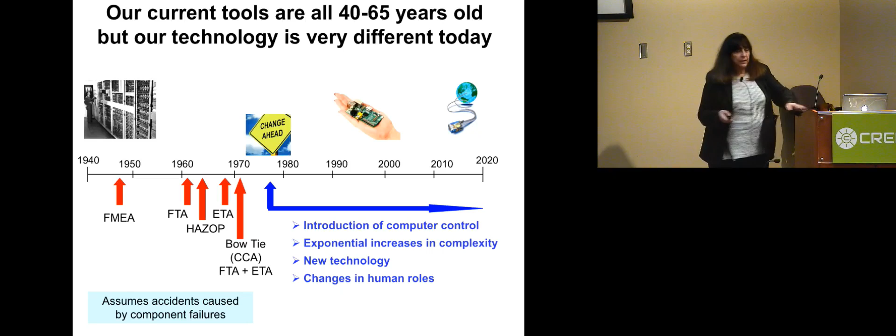Starting around 1980, all of a sudden the world of engineering changed. We introduced computer control to a great degree, exponential increases in complexity of the systems we were building, lots of new technology, and the human roles in systems were changing. Humans weren't just following a bunch of procedures — they were monitoring and supervising complex control systems, usually based on a computer.

Now, let's start with what do people do now, or what did they do then? What is the basis? Underneath all of this is this model of causality of accidents, which actually comes from the 1930s — the Domino Model. It basically says accidents are caused by a bunch of events like dominoes, each one leading to the next.

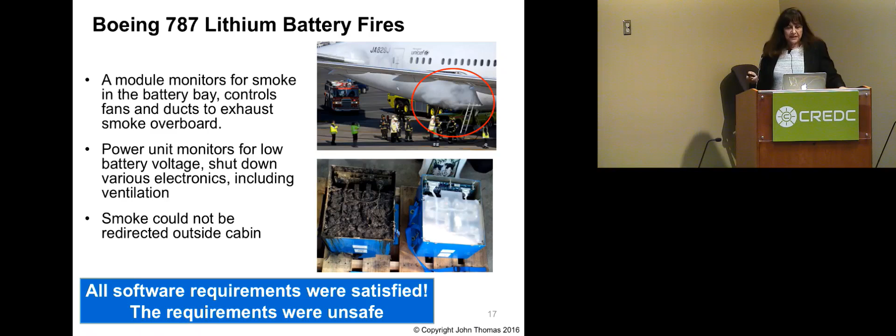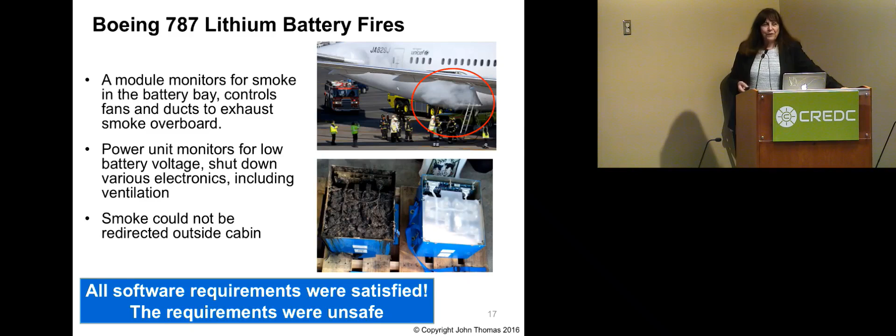All right, all the software requirements were satisfied. The requirements were unsafe. I've been doing this for 36 years. I've read hundreds of accident reports, and many of them had software in them. And every time software was related, it was a requirements problem, not a coding problem. So that's the first really important thing: everybody's working on coding and testing, and they're not working on the requirements, which is the real problem.

So there's two kinds of accidents: component failure accidents, which we still have, and component interaction accidents. These are related to complexity and coupling in our system design, and none of the components may have failed at the time. So we're confusing safety and reliability.

And everybody's still using all those tools, and they're missing all those accidents. The other thing I want to say quickly is, do operators cause all accidents? You've all been told operators cause most accidents. Pilots cause 80 to 90% of accidents, supposedly, and it's always human error.

Is it really? Well, the traditional view says the operator is the cause, so what we do is do something about the operator. Fire them if they aren't already dead, retrain them, suspend them, or do something about operators in general. If it's the operator's fault, get rid of them. So we marginalize them by putting in more automation, so they're farther away from the system they're controlling, or we rigidify their work by creating more rules and procedures that they can't follow.

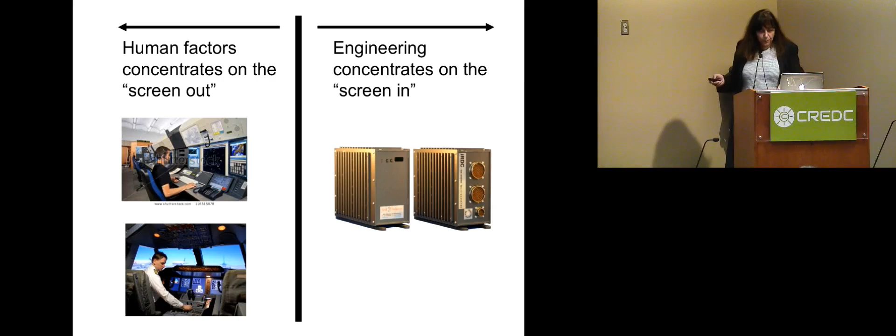And what we're ending up with is nobody looking at the integrated system as a whole. So we're designing this stuff as engineers where we're causing mode confusion, situation awareness problems, inconsistency. We are causing the pilots to make mistakes, and then we're blaming it all on the pilot instead of fixing the real problem.

So we need something new. New levels of complexity, software, human factors just don't fit into this reliability-oriented world. And so two approaches are being taken.

The second approach is at least they admit it, but then try and shoehorn the new technology and new levels of complexity into the old methods. I did that too for a while. My first thought was, all right, we already have fault tree analysis, we already have all these analysis techniques, just add software to them. Except it doesn't work, because this is a totally different problem that we're trying to solve.

So let's first look at the traditional approach to coping with complexity. It's called analytic reduction. This goes back to Descartes. It's totally what you've been taught your whole life in engineering and in your science courses. Basically what you do is, if we have a complex system, what do you do? Well, divide it into pieces, and look at each piece separately.

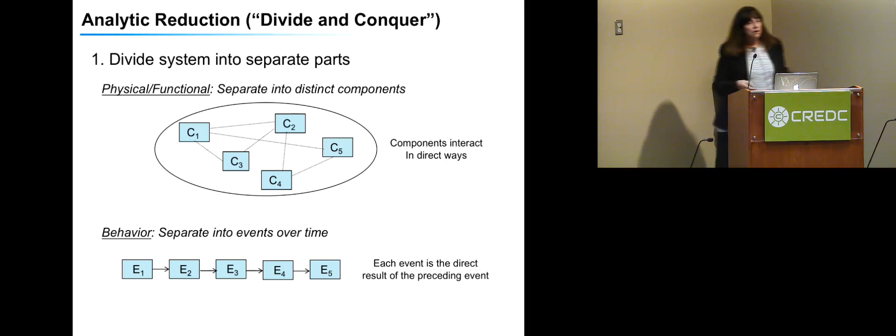So we divide them either into physical pieces or into functional pieces. And if it's behavior, we separate them into events over time. Look familiar? That sort of looks like my chain of events, and in fact it is. And then we analyze the pieces separately and combine the results.

But that makes some certain assumptions there. It assumes that when you separate them, you don't distort the phenomenon. Each component or subsystem operates independently, that their behavior is the same when they're looked at individually as when playing their part in the whole. They're not subject to feedback loops, nonlinear interactions, other kinds of things. And the interactions can be examined pairwise. Otherwise, we couldn't put them back together again.

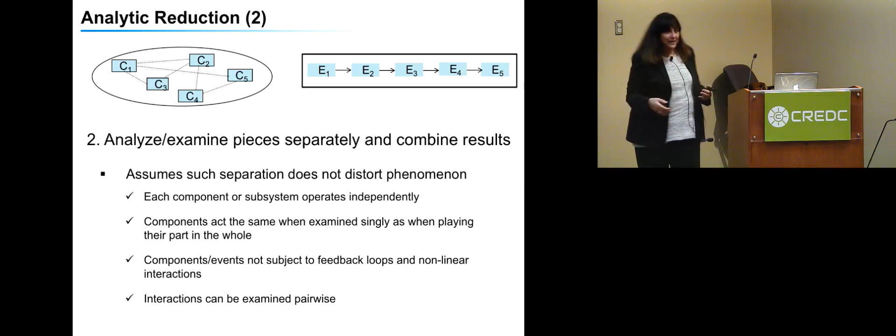All right, great assumption, works on all kinds of systems. I mean, it's made modern science and engineering. So I'm not going to complain that this doesn't work. It does, except it's not working on the new systems we're building. The systems we're building are tightly coupled, software intensive, highly automated, and connected.

Now, I can tell you, just don't build these. And you're going to look at me and say, oh, yeah, academic. Of course you're going to build these systems. So we're going to have to do something besides just say, don't build them. And to do that, I believe we need a new theoretical basis, because our systems don't fit the underlying theoretical model that's being used here.

People mean well. They're really trying hard to solve the problems. It's just that they're solving the problems for a different problem—providing techniques for systems that aren't true anymore, aren't there anymore. So we need new tools for the new problems.

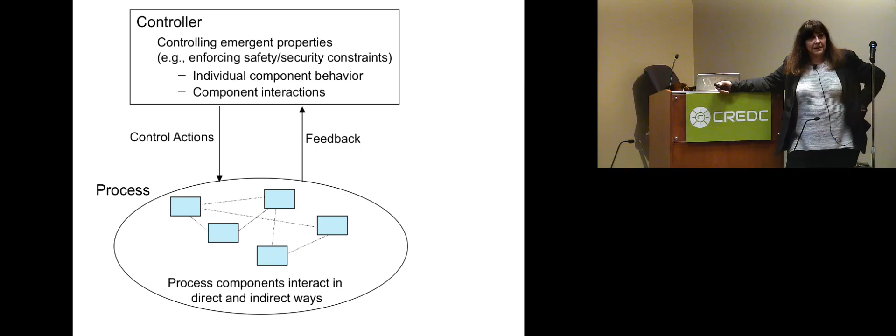So what do you do if you have an emergent property? You need to control it. We introduce a controller of some kind that enforces safety or security constraints on both individual component behavior and component interactions. We have control actions that the controller can issue to the process, and it gets feedback about the state of the process. Now, most of you are engineers, you've had a basic controls class, and you're going to say, well, yeah, that's just feedback control loops. Yep—underlies control theory, too.

Here's an example. If every airline decides that their planes are going to take the direct route to where they're going, at the time they want, optimizing each airline's schedule independently, what we end up with is everybody ending up at JFK, O'Hare, and probably LAX at 5 p.m. And of course, that's not going to work.

So what we do is put a controller that controls the interactions—the tracks that the planes go on, how they go, when they go. What we do is keep them apart, which maintains safety, and we optimize throughput, which is another emergent property. So every airline doesn't get optimal, but the whole is optimized, and they probably end up with a better result than if we just had chaos, or everybody fending for themselves.

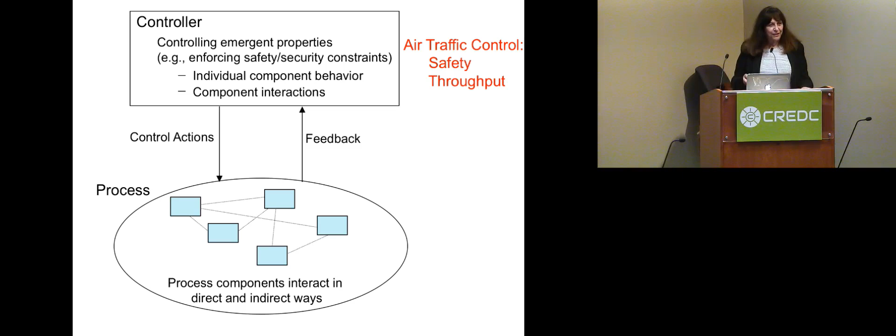So they enforce safety constraints: not violating minimum separation, maintaining sufficient lift. The level of liquid in an ISOM tower must remain below a specified level. Toxic chemicals and radiation must not be released from the plant. Pressure in a deep water well must always be controlled. Weapons must never be detonated inadvertently.

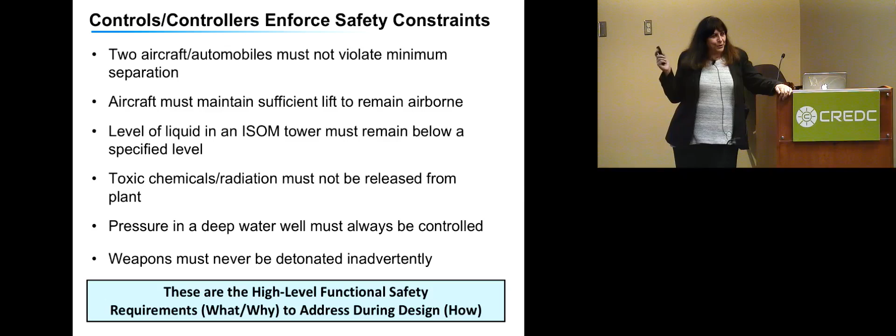These are the high-level functional safety requirements, and what we need to do is build a system that enforces those requirements. So what we've done is taken what was a failure problem and made it into a control problem.

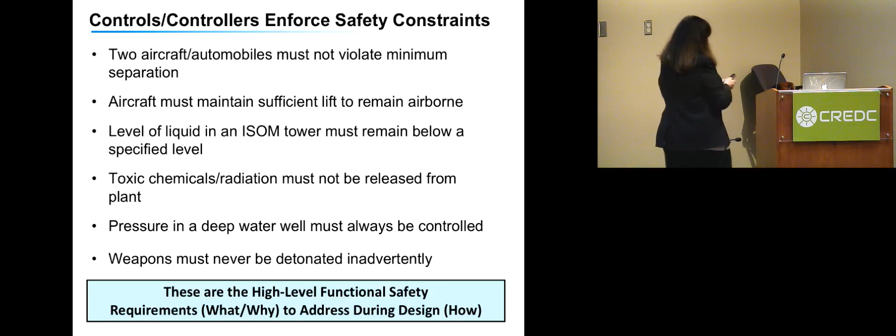There may be dozens of interacting control loops. That's the problem - they have this in auto, which one of my brilliant graduate students has figured out how to solve in a really easy manner, called feature interaction, where all these features on the car were all designed separately, somehow interact in unexpected and bad ways. So who would have thought that on a GM Cobalt, if you had too many keys on your keychain, it would cause the front passenger airbag not to work?

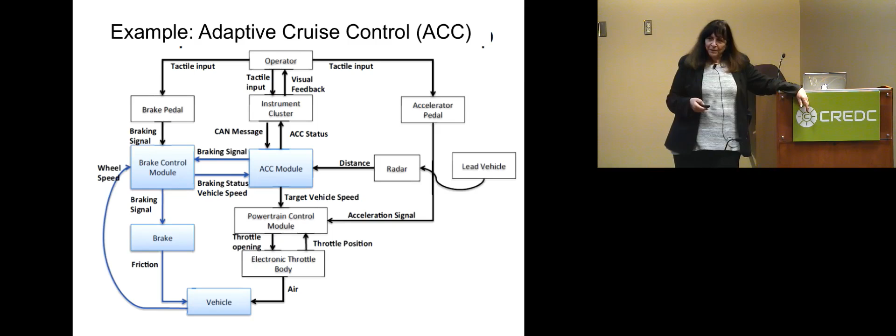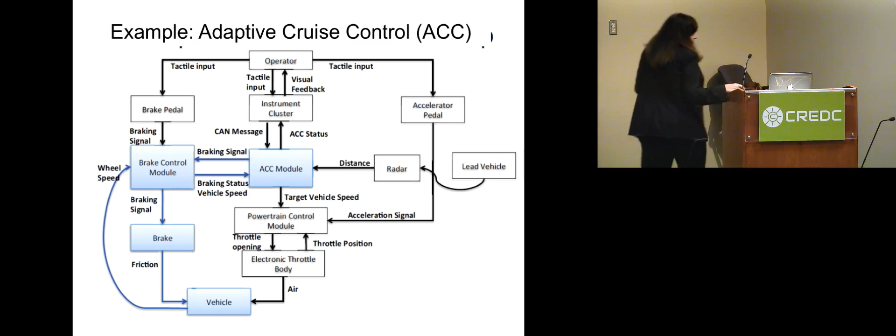And we've killed several people that way, or GM has. The complexity of these things is astounding. There are now, on the car you drive, probably, if you drive a new car, about 100 million lines of software. The F-35, the Joint Strike Fighter, the newest, latest military jet, only has probably 20 to 25 million - a fourth of that. Our cars are getting stupendously complex, and they're all using our techniques because the old ones aren't working.

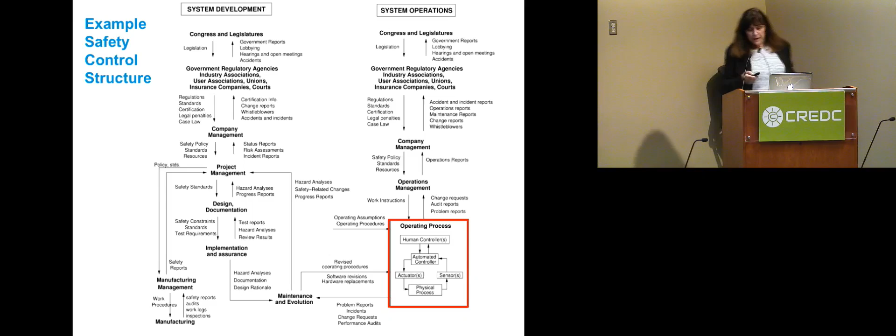So we can also put in - I know you can't see, and I want to spend a lot of time on it - Congress, regulatory agencies. Controls are also social controls or managerial controls. So we can include management, regulation, and other things into our analysis and our models. So again, what we're doing is recasting safety as a control problem. We design an effective control structure that eliminates or reduces these adverse events. And that can involve physical design, operations, management, social interactions.

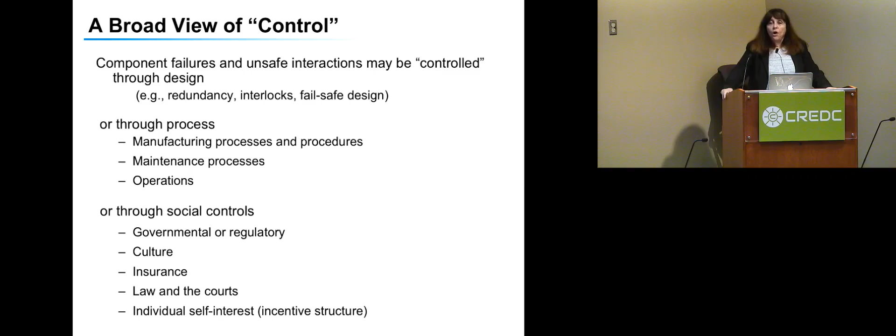And I just want to make one point. There's a very broad view of control being done here. You can control failures and unsafe interactions through design - redundancy, interlocks, fail-safe design, which we do now - or through process, manufacturing processes, maintenance, operations, or through social controls. Government or regulatory controls, culture, insurance, law - individual self-interest is probably the best way to get people to change their behavior.

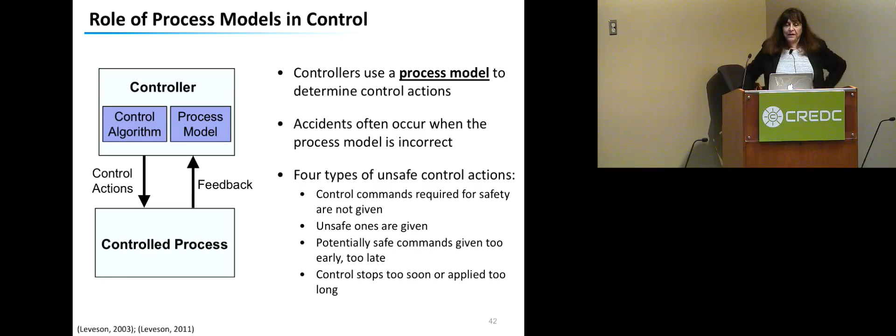There's one other aspect of this. In any control loop, there's actually a theorem in linear control theory: every controller must contain a model of the thing it's controlling. So I call that a process model - it's a model of the controlled process. In a human, we usually call that a mental model. In software, we have it, but you don't ever talk about it. It's usually just a few variables, but it has to be there.

I contend that accidents often occur when the process model is incorrect. For the Mars Polar Lander, the spacecraft was 40 meters above the surface, but the controller, the software, thought it had landed. So it issued a control action to shut off the descent engines. Now, that's a much better model of why software misbehaves than saying the software failed - I don't know what that means. Software is an abstraction. How do abstractions fail?

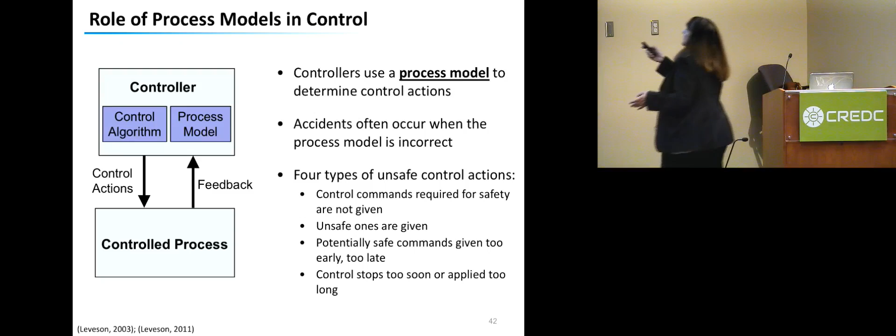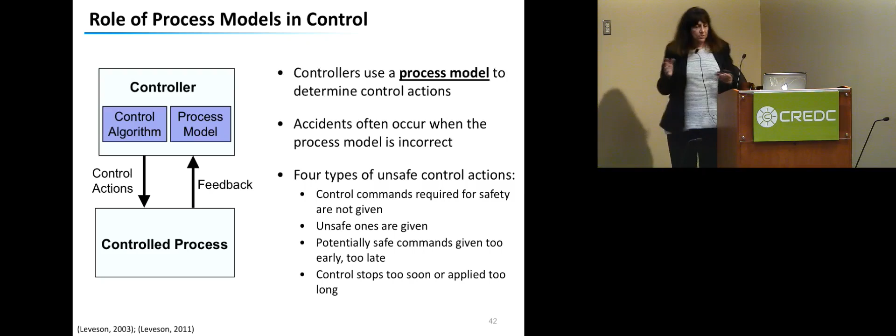There's 4 types of unsafe control. The control commands required for safety aren't given. The unsafe ones are given. Potentially safe commands are given too early, too late, or control stops too soon. I don't have time to go over those because I want to give some examples.

What we do is take that and look at - this is just a more detailed control loop. Here's a controller, actuator, sensors, the controlled process. There may be other controllers interacting with this. And what I did was annotate each of these with what could go wrong. The process model could be inconsistent, wrong, incorrect. The algorithm could be inadequate. These are the control actions - could be inappropriate, ineffective, missing. The actuator may not work, delayed operation here, conflicting control actions. Component failures - we still have component failures. I haven't gotten rid of anything, I'm just adding.

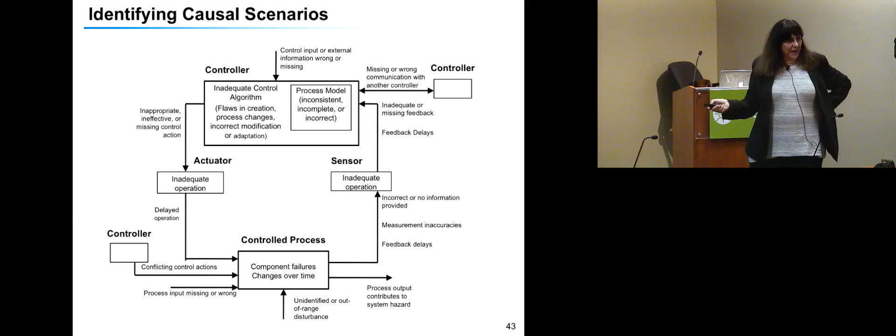Changes over time on the feedback, measurement inaccuracies, feedback delays, missing feedback, and so on. And what we do for the analysis is we just build that control structure like you saw for the braking system, the adaptive cruise control, and do an analysis on that control system, that control loop. And that's all we're doing.

I'll tell you a quick example. The whole underlying model, replacing the chain of events model, is called STAMP, System Theoretic Accident Model. It's just a new, more powerful model, based on systems theory rather than reliability theory. It treats accidents, or losses, as a dynamic control problem versus a failure problem, and it includes the socio-technical system, component interaction accidents, software system design, human errors, and so on.

And what we can do is take STAMP, which is just a theoretical model, and build a bunch of tools on top of that, like new accident analysis tools, new hazard analysis tools, new security analysis tools, new ways to identify leading indicators of increasing risk, organizational cultural risk analysis, and put those together into various kinds of system engineering, risk management, regulation, and so on processes.

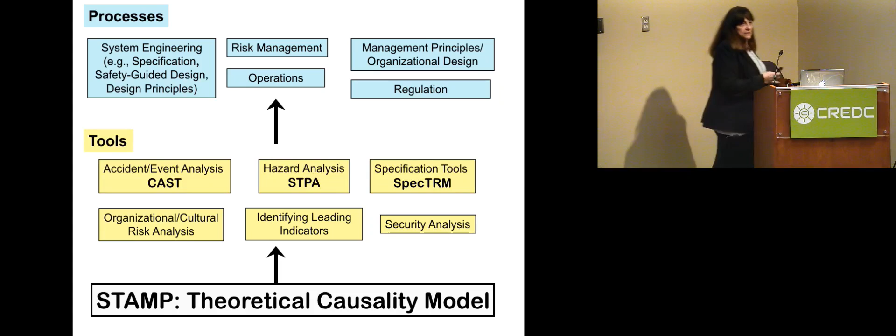And one of the good things about this is we can start it early. This is pretty standard: 70 to 80% of safety-related decisions are made in concept development. But here's concept, requirements, design, build, operate - we normally don't start doing it until at least we have the requirements, and usually we need a design to use the current techniques. It's too late.

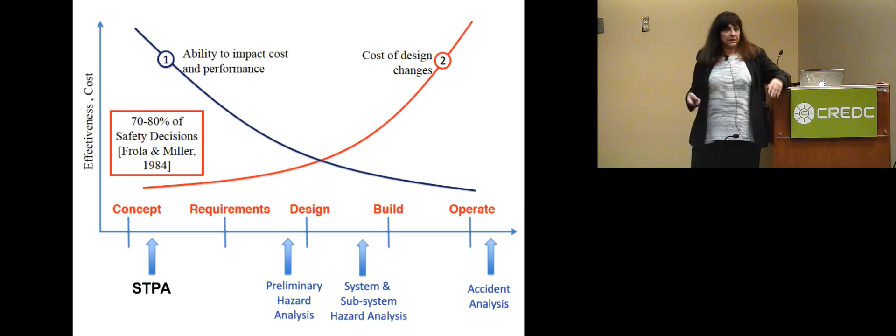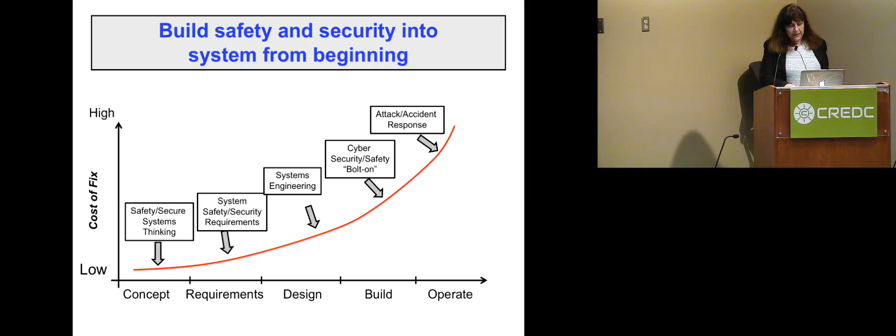The cost of making changes late is enormous. Rework is the biggest cost factor in any system engineering project, and it's why things fail, or go over budget at least. So what we want to do is build safety and security in. Same thing with security - we tend to spend a lot of time on attack response. Maybe we add some bolt-on stuff during the build, at the end, bolt on some security techniques. Almost nothing is ever done in designing this thing to be safe and secure from the very beginning. That's what we can do with this new approach.

Now I'm going to go over one example quickly to show you the results you get. This was a non-advocate safety assessment of the U.S. ballistic missile defense system, the new missile intercept system that we have. It was done just prior to deployment. The hazard was inadvertent launch, and nobody knew how to do this. This is an enormously complex system, probably one of the most complex we've ever tried to build. And they had to do the safety assessment for inadvertent launch, but nobody knew how to do it.

I came up with this idea around the year 2000, but I didn't say anything to anyone because it was so bizarre and weird compared to what people have always done that I thought they're going to say, oh yeah, Leveson, she did good work when she was young, like N-version programming things, experiments, but now that she's getting older, she's sort of lost it. So I didn't tell anyone because I wanted to try it on some real systems. I wasn't really planning to start with something quite this real and this complex. So someone did this without telling me until afterwards, because I would have murdered them.

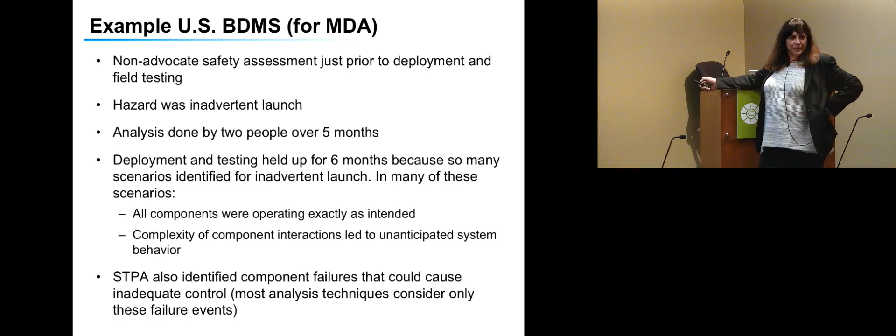What? It's being recorded, be careful. That's right, that's right, I'm really actually a very pacifist. I would have only written them a nasty note.

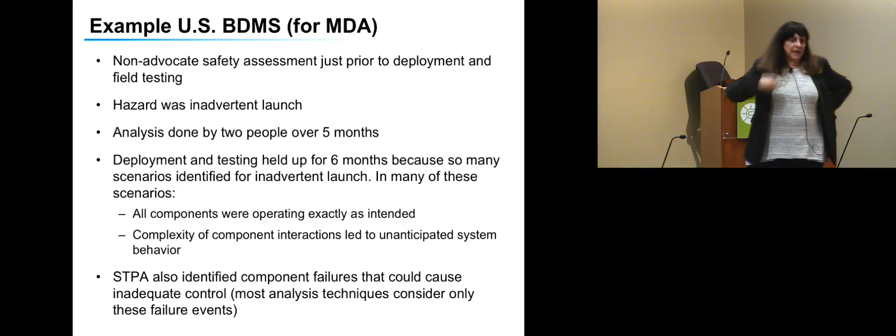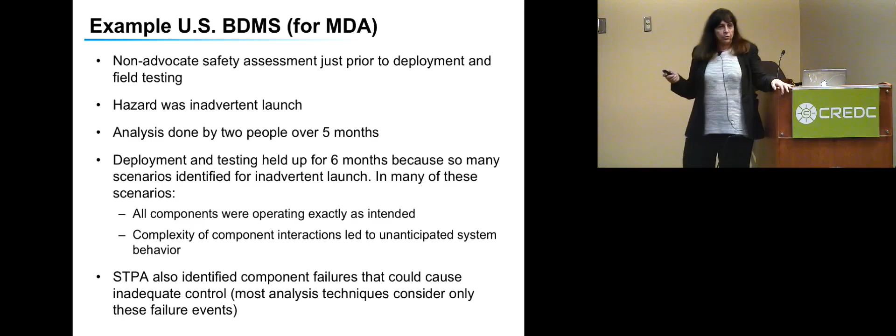The analysis was done by 2 people over 5 months. These 2 people, who didn't know anything about the system to begin with, found so many problems with it that deployment had to be delayed for 6 months. It cost them $200 million just to fix the stuff which was really low-hanging fruit that they found first, and then they hired them to do this for the rest of the system. But what they found was exactly what we said: there were lots of scenarios where all the components were operating exactly as intended. It also found the component failure scenarios that the old techniques find, but those didn't find the other ones.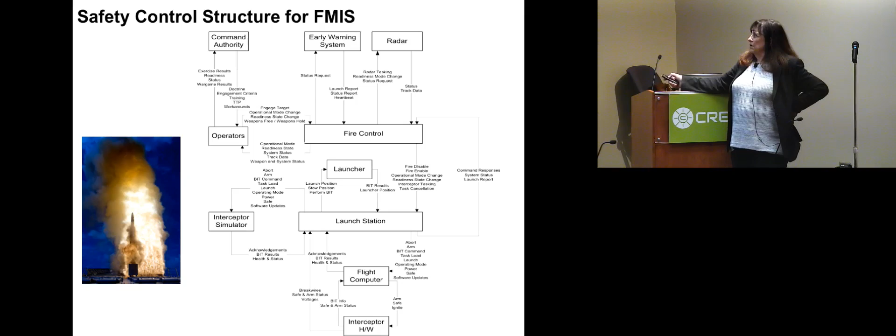The fire control computer, if it thinks it has a missile coming in or several missiles, it's called track. They have an active track. They send a command, and the one we're going to be concerned with is fire enable, to the launch station, which controls the flight computer, which launches an interceptor. There's also a launcher here, and some simulator that's always going on to make sure this thing is still working.

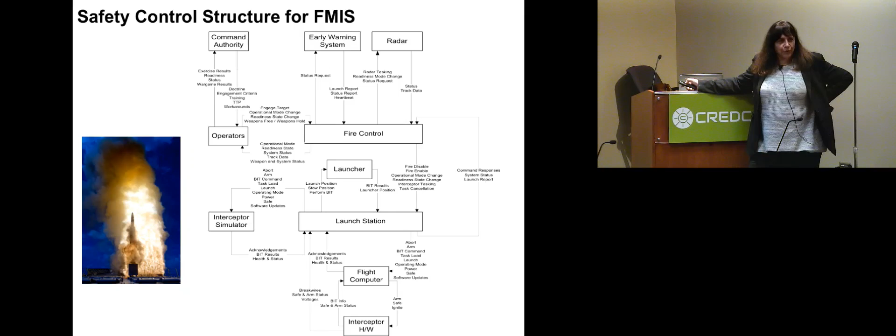So the hazard of inadvertent launch says that the launch station issues a launch command to the flight computer when there isn't an active track, right, when it isn't a threat. And that can occur if the fire control computer issues a fire enable command.

Now, so we take those 4 types of unsafe control actions, and let's look at fire enable. If it doesn't provide it, it's not unsafe. So it doesn't provide a fire enable. There's no unsafety with respect to inadvertent launch. It didn't tell anyone to launch.

If providing it when there's no threat detected, wrong timing, discover the track is spurious, they send a fire disable. So they send a fire enable. They decide, oh, this is spurious. This is a friendly thing, a flock of birds or something. So we're going to send a fire disable, but they arrive in the wrong order. And the other one isn't applicable.

So let me just give you an example of what we come up with, what the results are. Here's a fire enable causing the hazard. The process model incorrectly thinks the threat exists.

So the fire control computer is intended to send the fire enable command to the launch station when it receives a weapons-free command from the operator, the human operator. FMIS just stands for fictional missile intercept system. The Defense Department gets a little unreasonable about my showing the real system. So this is a fictional system, but very similar to the real one.

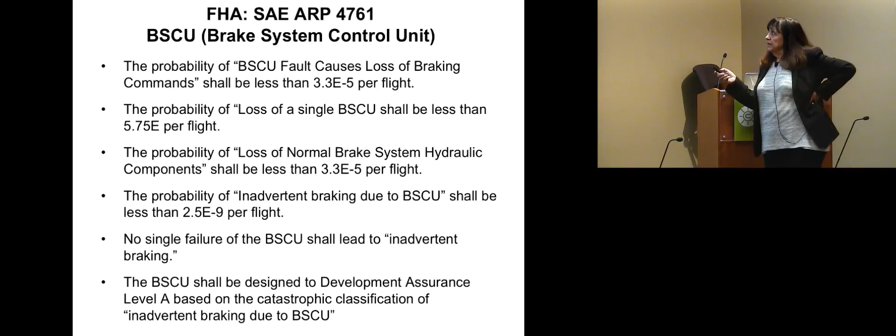Now, just to show you what other people do and the standard techniques do, this is from the standard that's used to certify aircraft in the US. And it's for the brake system control unit. This is an example right from the standard. It provides requirements like the probability of a brake system control unit fault causes loss of braking shall be less than 3.3 times 10 to the minus 5 per flight.

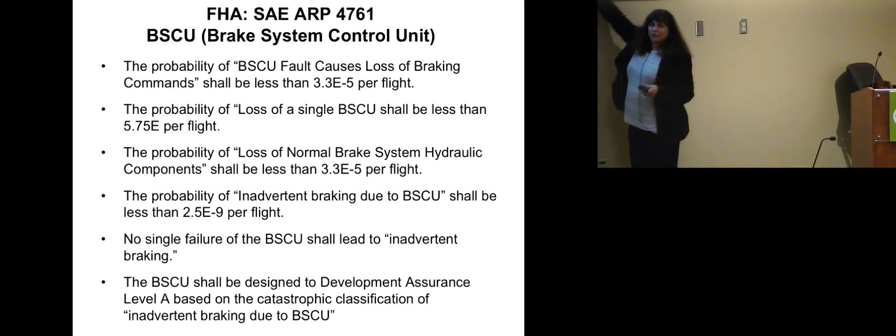And you saw all of these are just probabilistic requirements. They don't know what to do with software. So they say, well, we'll just develop software to a certain rigor. And that's development assurance, which mostly means you do a little extra testing on it. But it does nothing about requirements, which are the problem.

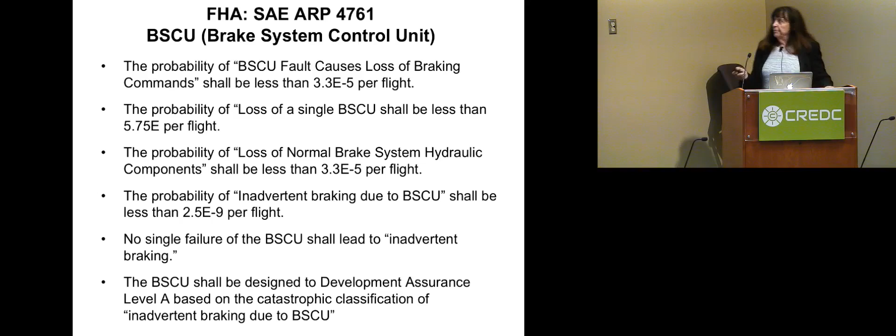The same thing using STPA, our technique. Brake command, this is just one example, not provided during landing roll, resulting in insufficient deceleration and potential overshoot from, you don't brake, in other words, when you land, after you land. Scenario 1, there's an auto brake, believes the desired deceleration rate has already been achieved or exceeded, and so on. The reasons may include, and it gives some reasons why this could happen.

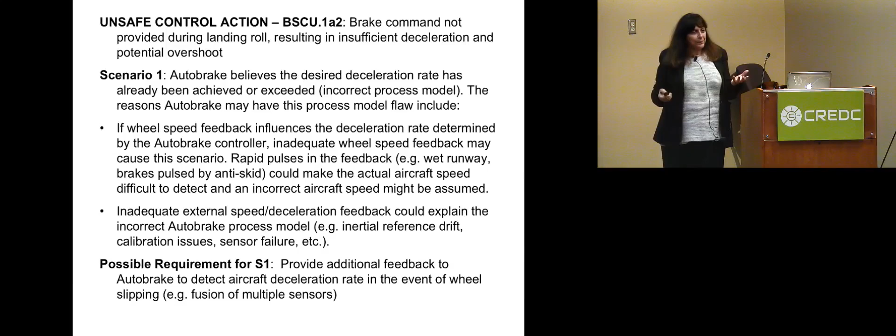And what we do then is generate requirements for the software and for the system. But behavioral requirements, not these useless probabilistic requirements. I don't know what to do with that kind of probabilistic requirement. Sorry, I haven't got time to answer your question yet right now, but I will later.

So I'm almost done. So as I told you, Bill Young decided this could be used for security too.

Safety is concerned with unintended actions by benevolent actors. Security prevents losses due to intentional actions by malevolent actors. The only key difference is intent, but our common goal is to get rid of the losses.

The goal is not to keep people out of our system, which is what we concentrate on now. I don't care if they get in my system. What I care about is maintaining that the critical functions of the system are able to be maintained.

So what we do is the same kind of analysis on here, but let's say each of these, a feedback delay, that could be unintentional, but it could be on purpose. We add more scenarios, but we do the exact same thing as for safety.

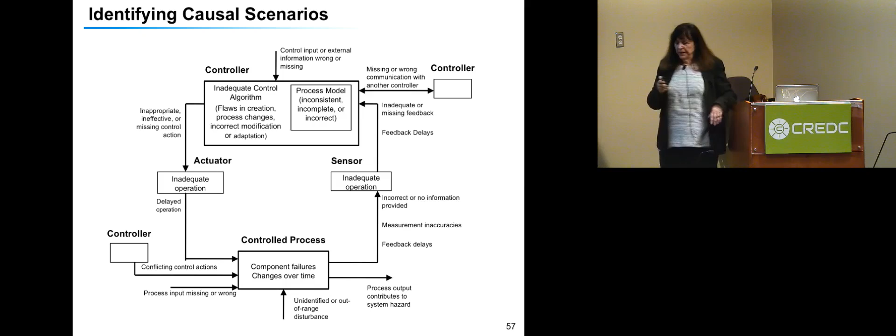So Stuxnet, I'm sure most of you know what that is. The loss was damage to the reactor, in this case it's the centrifuges. The vulnerability was that centrifuges are damaged by spinning too fast, and they put a virus in, or whatever it was, to make them spin too fast.

Constraint is centrifuges must never spin above the maximum speed. The hazardous control action is issuing an increased speed command when it's already spinning at the maximum speed.

One potential causal scenario: incorrect process model. It thinks it's spinning at less than the maximum speed, and so it issues an increased speed command, which is apparently what this did. It could be inadvertent. It could be deliberate. I don't care whether it was on purpose or not.

I don't want this thing damaged. I don't want my nuclear power plant to melt down, whether it's deliberate or not. I want my brakes on my car to always work, whether there's a hacker on it or whether it isn't being hacked. There are potential controls we could put in here.

Mechanical limiter, an interlock, an analog RPM gauge, which would independently measure the speed of this thing and provide feedback.

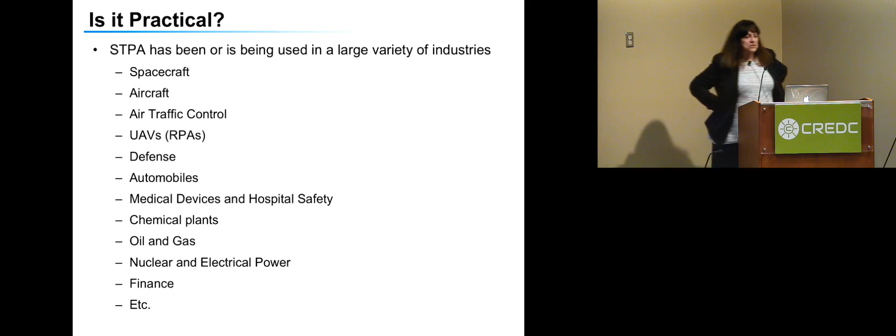Does it work? STPA is being used on a large variety of industries, just about everything now. Most of the auto companies are all now using it.

Is it effective? Well, there have been lots of comparisons made, and every one STPA found the same causes as the old traditional hazard analysis methods, plus it found more. The most interesting one, I think, for this group is something done by EPRI, the Electric Power Research Institute, because it's a power institute, and they compared it.

They took a nuclear power design, and they gave it to experts in each of these techniques and asked them to do a hazard analysis on it. STPA did much better, but what's most interesting is it turned out, they told them afterwards, there had been an accident in this plant, which was very serious, and only STPA found that scenario.

And why? It was the only one that could, because it was a design error. It wasn't a component failure problem. Same thing happened with lots of evaluations for the security parts by US Cyber Command.